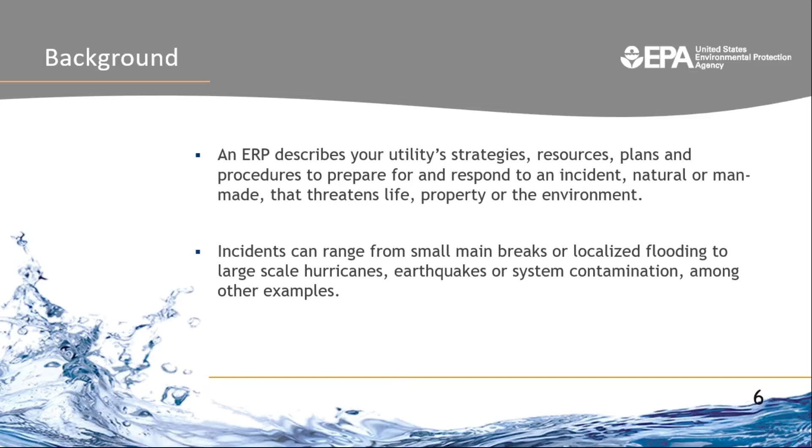So when an incident occurs and you have a well-developed, tested, and/or exercised comprehensive ERP in place, you will need to respond and activate the procedures and protocols described in your emergency response plan. That's why it's important to have that set up. This can include implementing personnel emergency roles and responsibilities with your staff, making sure they already know how to handle these incidents and are trained on their specific emergency response roles.

It can also include setting up your utility's incident command system structure, as well as the incident management systems the utility operates under. Some utilities may only have one or two operators, so it may be very difficult or impossible to actually implement an incident command system, but it's still important to learn and see if you can tailor the ICS to fit your utility's structure.

This can also include recalling personnel on vacation and notifying external agencies such as your local emergency management agency, police, fire department, and state regulatory agency. At a previous workshop, one utility in the Midwest indicated that during a major flooding event that came up quickly, they had to call back personnel who were at conferences and on vacation to help with the incident.

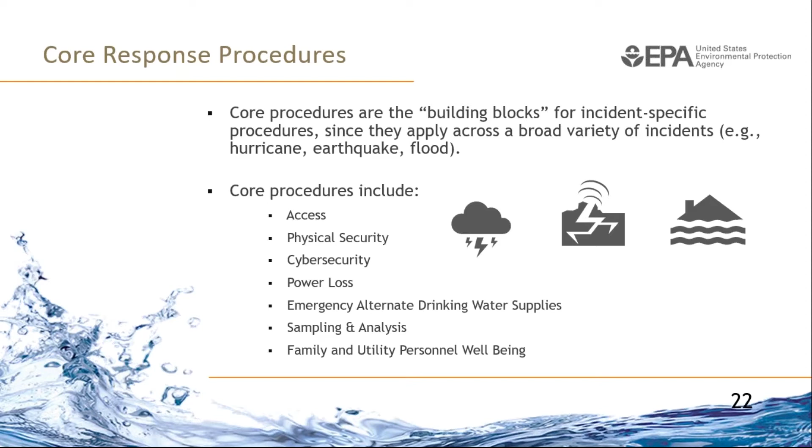Our second part of the emergency plans and procedures is our incident-specific response procedures. This should be very accessible, pretty much like a rip and run document that can be detached and easily taken to the field. You may need 1 or 2 pages to cover specific response information in these procedures, since you've already addressed basic emergency response steps under your core response procedures.

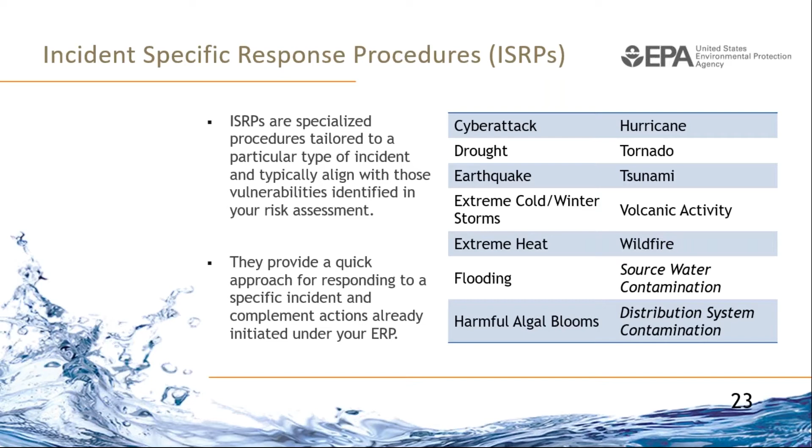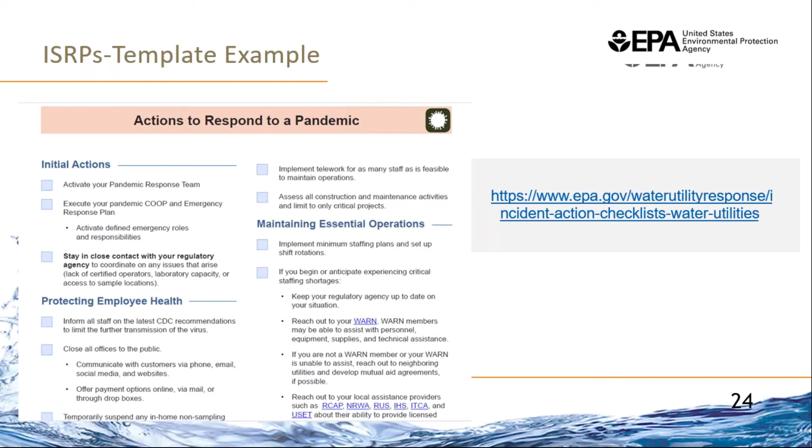What we have done is the EPA has developed a type of ISRP, called the Incident Action Checklist. On our site, we actually have 12 different types of incident action checklists that you can go ahead and download and use. Your system can just use them as a guide to create your own incident-specific response procedures. Here is an example of an incident action checklist pertaining to the pandemic. You'll see a link right here on the right, so you can go ahead and access the different checklists that we do have available.

The third criteria, we have our mitigation actions. More specifically, AWIA states that this is actions, procedures, and equipment which can obviate and significantly lessen the impact of an incident on the public health and the safety and supply of your drinking water provided to your community. This includes development of alternative source water options, relocation of water intakes, as well as construction of flood protection barriers. Since these 3 mitigation options are specifically included in the law, you should indicate in your utility's ERP that you've considered all 3 of these specific mitigation actions, but the actions do not have to be implemented if they're not consistent with your utility's risk profile as determined in your risk assessment.

What you want to remember is that it's more cost effective to mitigate the risk from natural disasters than it is to repair the damage after the disaster. Some examples of mitigation projects you can include: elevation of electrical panels at a lift station to prevent flooding damage, replacement of piping with flexible joints to prevent earthquake damage, and reinforcement of water towers to prevent tornado damage. Overall, your mitigation measures require financial investment by the utility. However, mitigation could really prevent more costly future damages and improve the reliability of service during a disaster.

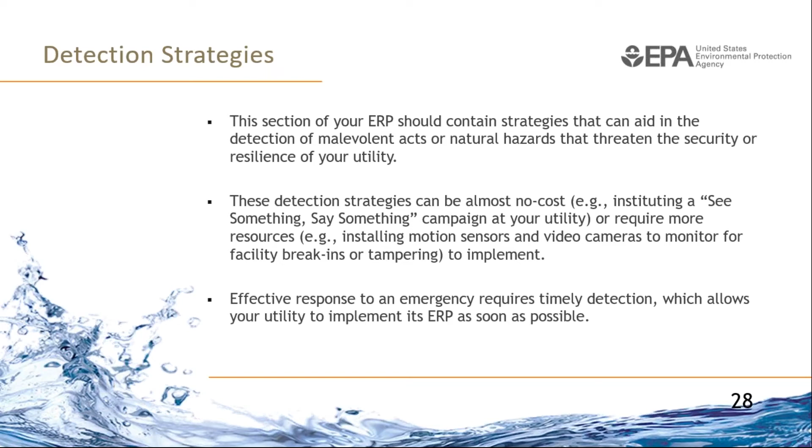You really want to keep in mind that an effective response to an emergency requires timely detection. You want to know about something as soon as possible, even before it happens, so that you can respond to that specific incident.

There's also water contamination, so you want to make sure you have notification of source water contaminants. These can come from many different agencies and organizations, including your primacy agency, 911, your LEPC, etc. Potential contamination in your distribution system can also be detected through customer complaints, public health surveillance, and sampling analysis.

These can help alert your utility of potential backflows or different events, so you really want to make sure you utilize all of your resources.

Another detection strategy is for cyber intrusion, which is learning about and reporting cyber threats. This helps your utility be better prepared to detect and respond to this kind of malevolent act.

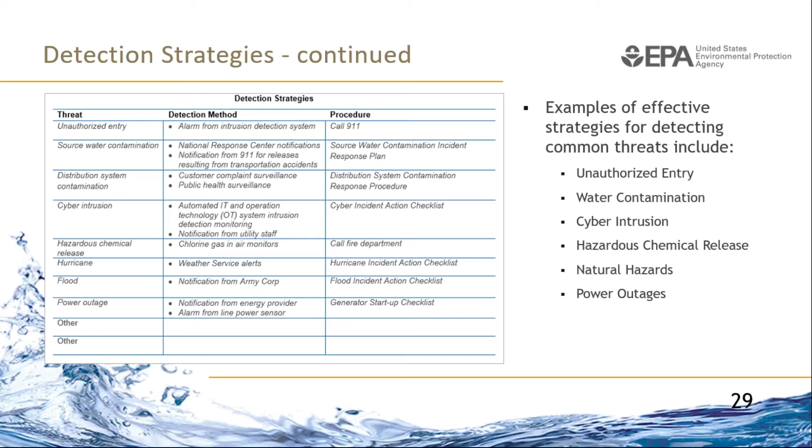You also have hazardous chemical releases, natural hazards, as well as power outages. You really want to make sure you have these detection strategies in place so that you know if one of these threats occurs.

So we have our quiz 2 question: according to AWIA, which of the following needs to be included in your ERP? We had 98% say all of the above, 1% said detection strategies, and 1% said emergency plans and procedures. The correct answer is all of the above.

You just want to remember that all 4 of these criteria need to be included in your ERP.

Going into our next session, now that we've gone through the ERP guidance template and instructions, we'll have a group discussion based on the fictitious water utility, Spring View Water District. You used this in module 2 during your breakout sessions, and we're going to use this to show how you can develop your ERP.

Just a quick review of the scenario: Spring View Water District is a small utility located outside of Atlanta, Georgia, that serves 35,000 people. Here are some critical assets that Spring View Water District considered when developing their risk and resilience assessment, which will be relevant as they develop their ERP.

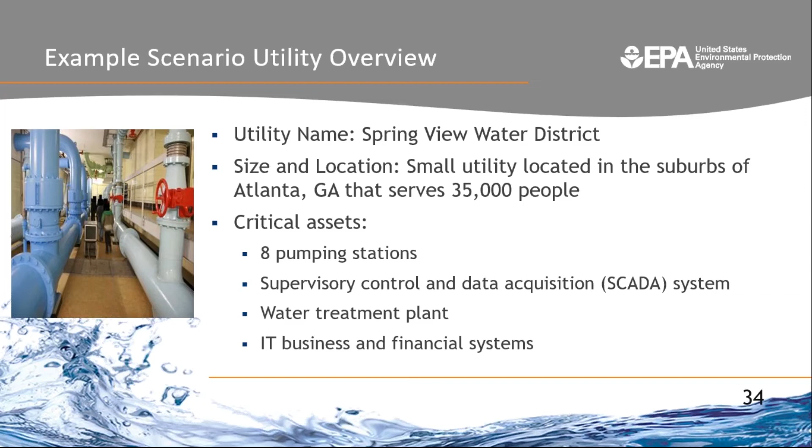The hypothetical threat that we chose pertains to flooding. The threat is that there is a 100-year flood event.

Spring View Water District is located next to the winding river where it draws its water source from. They are concerned that a 100-year flood could damage electrical components of their water quality monitoring equipment, which is currently on the ground and not elevated. This could really disrupt their monitoring of the finished water leaving their facility.

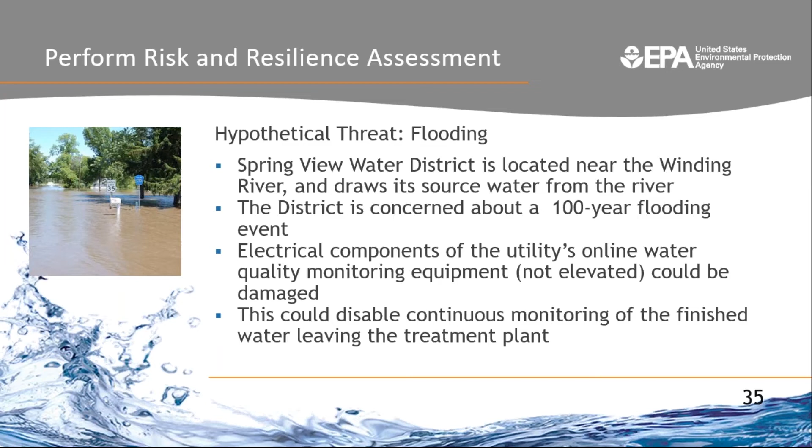One of the first things you see is your CWS name, which you're going to input. I'm going to quickly transition to a pre-populated version. As I scroll down, I went ahead and put in Spring View Water District.

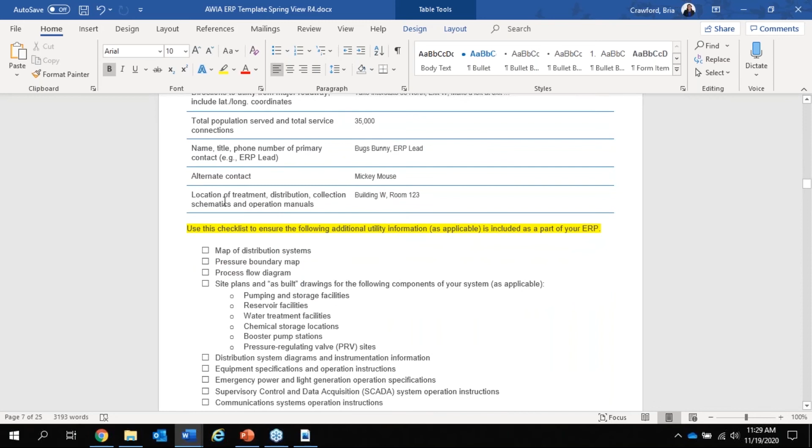Going into your utility information, you're just putting in your PWSID, your utility name and address, your owner, directions. You want to make sure that you include some directions for anyone who's using your ERP that's not necessarily a part of the utility, but is a responder. Your population served, the ERP lead, which of course is Bugs Bunny, and then just in case Bugs Bunny is out playing some basketball in Space Jam, we have an alternate contact who is going to be Mickey Mouse. Mickey Mouse is another reliable person, pretty much ahead of the team. And then you're just going to put the location of where your manuals are.

And right here is a checklist. That's one of the things that we did discuss. It's the checklist to actually show what are some of the things you want to include in your ERP. So kind of going back to the critical assets that was discussed in the slides for Spring View. Depending on your utility, you can go ahead and check these. You can also uncheck things that you don't need.

Just a reiteration, I hope you don't get tired of this. It's user friendly, so it allows you, as you're updating it, if you need to take something out, you can uncheck it, update it again. If you're adding something, you can go ahead and check it. For our Spring View, we have that SCADA system, so we checked that. We also talked about power, so we went ahead and checked that. We are including some site plans. There's a water treatment facility that we have. We also have those 8 pumping stations and then a map of distribution systems, especially since it's a water treatment facility. And then we're going to go ahead and just click this pressure boundary map as well.

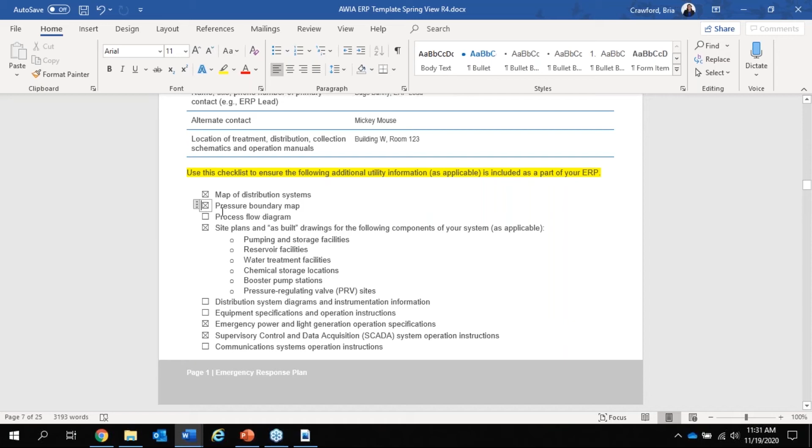Now we're going to go ahead into personnel information. We have an interesting group of personnel on our site. We have Huey Duck, Dewey Duck, Louie Duck. We also have Minnie Mouse, and then we have Popeye. These are just some critical assets to our facilities. Huey, Dewey, and Louie do get into a lot of trouble during their DuckTales episodes, but for this purpose, their different incidents can actually help them with creating this ERP. You just want to go ahead and make sure you list the information of who are your personnel and then just some of their job duties. You also want to make sure you have their contact information as well as any emergency information just in case they're not on site so that you can know how to get in contact with them if they're needed.

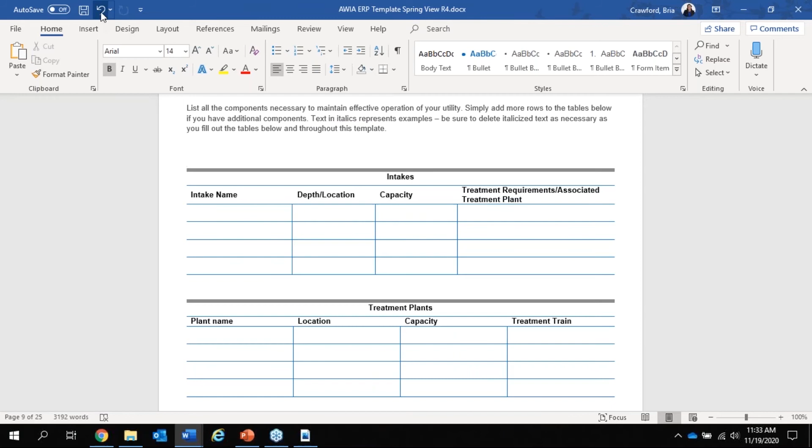Going ahead, what we mentioned before was the primary utility components, which are the wells, the intakes, the treatment plants. You may not have all of these on your site. We have this option within our tables where you can go ahead and if you don't need it, you can delete it, backspace, voila, it is gone. Of course, if I did that by accident, I can go ahead and undo that. If I have a well name, ABC can be a well name, but I only have 1 and I don't have 3, what I can do is I can delete these 3 rows. I'm going to delete the entire row. If I want to insert a row, I can go ahead and just right click, insert rows below. So user friendly, anyone can use this, Microsoft Word. That's just an example of how you can delete a section, add rows, etc.

There's also this option right here where we have this little triangle. If you click here, it can actually just hide the section. Let's say you don't want to delete it, but you still want it to be in your specific document on your desktop, you can go ahead and hide that section. I can go ahead and hide treatment plants. And now you're doing an update, and let's say you actually do need to include it, so you can just unhide it for both your intakes as well as your treatment plants.

Just going down here, of course, storage and distribution system, and then we have the treatment chemical storage facilities. One thing, if you remember from our scenario, is that we have 8 pumping stations. So let's say the first one includes chlorine, and then you'll add some comments. Just to kind of add some more discussion, I'm going to go ahead and enter pump house number 2, and you can go ahead and give some examples of what chemicals may be stored on your site. Just going ahead and remembering you can go ahead and insert more of whatever you have, and then the chemicals, and then you'll just have comments, which will go in the comment section.

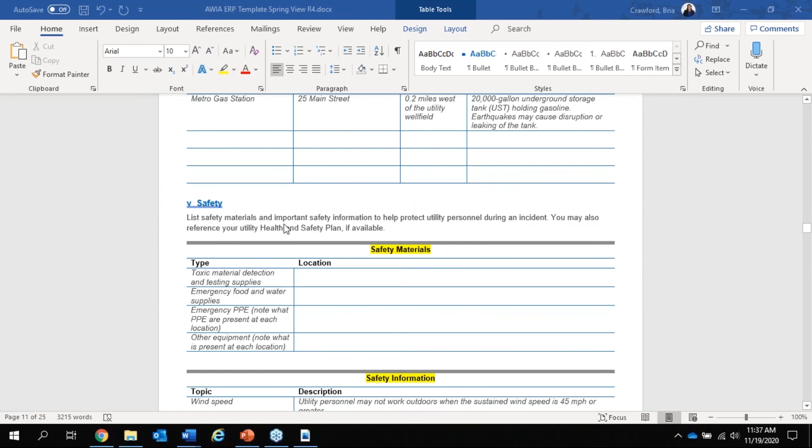And then these are just some other tables that are listed within the template as well. You have your industry chemical handling facilities, chemical storage tanks, and then we go into the safety information.

So let's just go through, let's do toxic material detection and testing supplies, and then let's do emergency food and water supplies. So where are some of the locations that you may have these on your site? What we're doing here is just using these little examples to get you thinking about what you can input into your ERP.

So another section, we have safety information. The topic right here is wind speed, and then it gives you a description: utility personnel may not work outdoors when the sustained wind speed is 45 mph or greater.

And since we're talking about flooding, I'm just going to type in flooding, and if we can get 2 descriptions: water is up to the raw water station, a nearby creek is 5 feet above normal levels, the level is above the spillway.

We also have response resources. So this is just an example of kinds, generator, fuels, pumps. And going back to what I said before, all of these are just examples. So if you don't have this, you can go ahead and delete the row, or instead of deleting the row, you can include whatever you have.

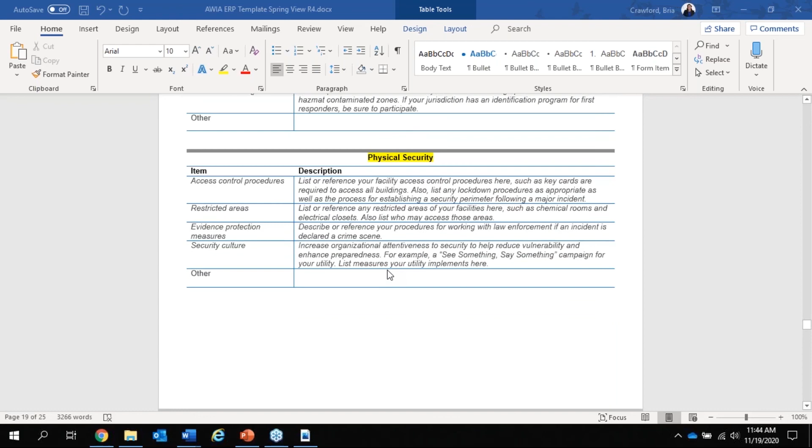You will also have your physical security, since it's flooding and you don't know who may try and have a malevolent incident while things are going on. Power loss was another one.

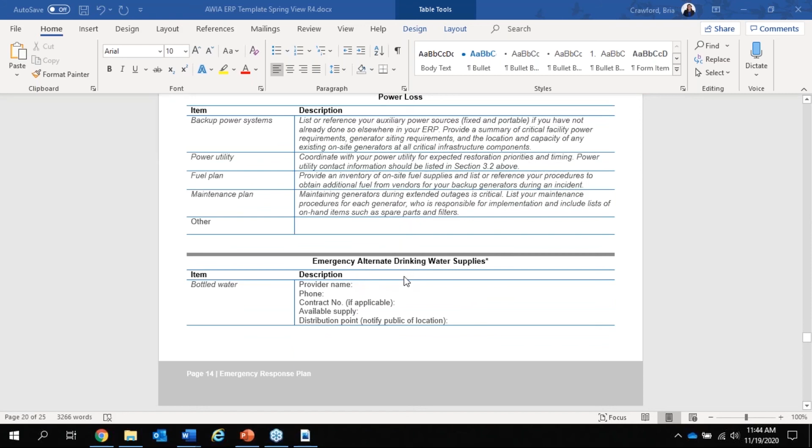Right here for your emergency alternate drinking water supplies, you can go ahead and just add descriptions. Sampling and analysis—so these were things that we covered.

One thing that was really important that I stated earlier was your family and utility personnel well-being. And right here is a family disaster plan, and it's really good that it's actually included in the template. So you can go ahead and just describe what your family disaster plan would be.

And then we also have your incident-specific response procedures. I just went ahead and highlighted flooding since that's our specific incident. As you see within the template, here's the link to access the incident action checklist. If you want to include that within your ERP as an attachment, you can find the checklist for flooding and add that in there. This specific scenario is just for flooding, but you can also include incident action checklists for other things such as hurricanes or cybersecurity. I just highlighted it for this example, but it's your ERP, so you can include other incident action checklists as well.

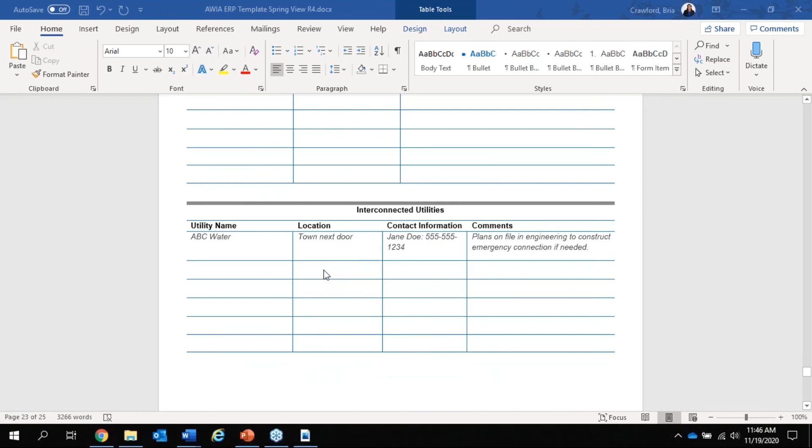We also have our mitigation actions. I highlighted alternative source water options, and one option was a well from a municipal golf course. You also have your interconnected utilities, so make sure you have your utility information. These are some of the mitigation actions that can be used, such as water intake relocation, watertight doors, and earthquake measures.

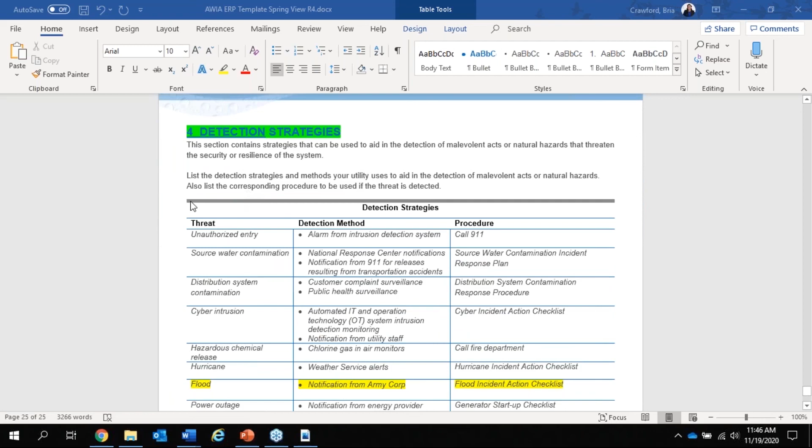We also have your detection strategies, which is the last of the four criteria. These are just some examples of the different threats that can occur and the detection methods. You can use these, or if you have other detection methods, you can type that in or insert those as well. So our threat is a flood, and a possible detection method could be to notify the Army Corps, and the procedure will be to use your flood incident action checklist.

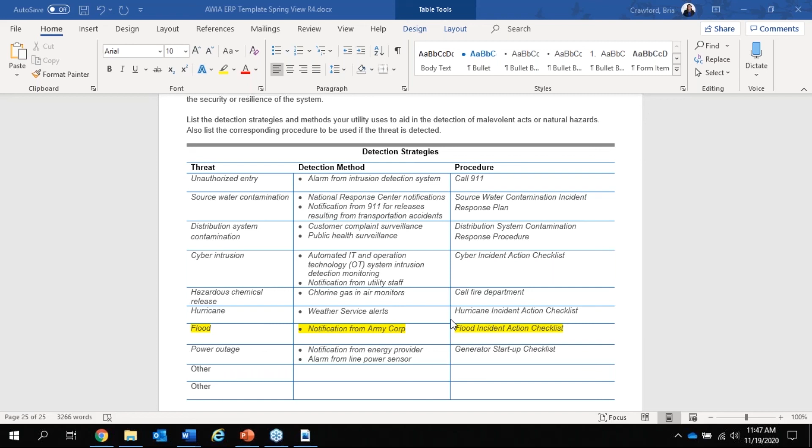And this is just an overall view and examples of how to use the ERP template and how to actually fill it out.

Some final thoughts on ERPs: as you respond to an incident, you should document all of your decisions, actions, and expenditures. This is important for justifying any incident costs and potentially seeking reimbursement once the incident is resolved. Good incident documentation includes creating a paper trail for receipts, records, photographs, and personnel timesheets.

One resource we have that can be used for different incidents is our Water Utility Response on the Go app, which you can download on your phone. If you have Apple, use the App Store; if Android, use the Google Play Store. Search for it, tap install, and once installed, you can open it. You can also allow notifications and set this up in case there's a severe weather forecast in your area. This is a free app.